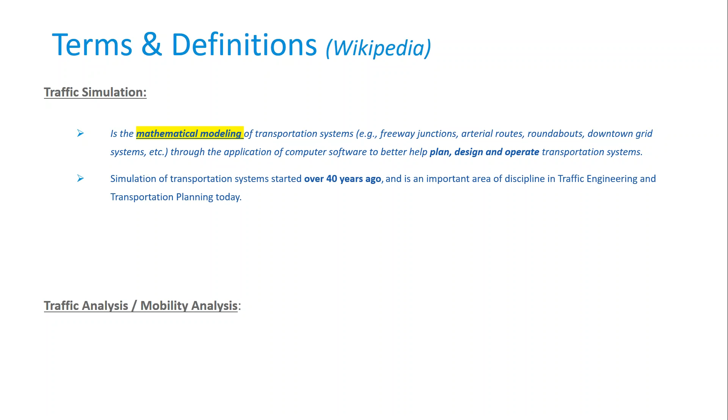The simulation of transportation systems started a long way back, over 40 years ago, and it's a very important area of discipline in traffic engineering and transportation planning today. The simulation in transportation is important because it allows us as engineers or as consultants to study models that are too complicated for analytical or numerical treatment manually. And it also helps us produce very attractive visual demonstrations of present and future scenarios. Hence, we know how to design our projects or expand them further.

For traffic analysis on the other side, or mobility analysis in civil engineering, it's basically studying the interaction between vehicles, drivers, pedestrians, cyclists, and other travelers and infrastructure objects.

So anything basically that moves within our system or structures is part of the system analysis, so things like highways, signage, and traffic control devices. The aim of having that analysis is understanding and being able to develop an optimal road network with efficient movement of traffic and minimal traffic congestion problems. So these are just top definitions for these two items.

Now, before we talk about the software and how to make use of it, we need to understand the travel model. So in any travel model, we have zones and we have areas. I'm going to talk about both, but let's think of people moving around our transportation systems as demand. These people demand a certain level of service. They demand that they're able to move from point A to point B, etc. And then the supply basically are the vehicles or means of transportation, like walking, like taking a taxi, a bus, etc.

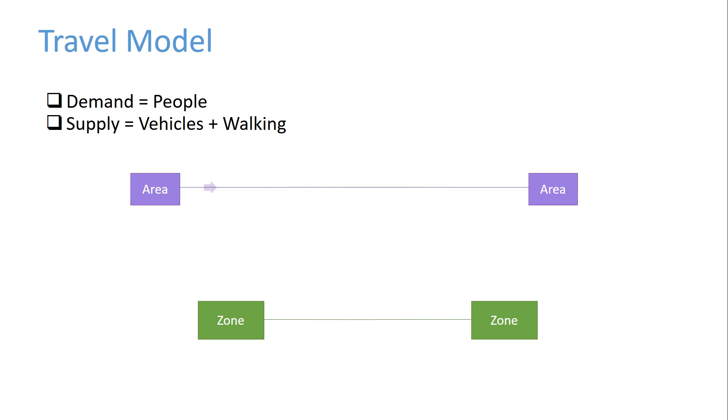What we're doing with InfraWorks or tools like the mobility simulation within InfraWorks is basically being able to model the journey from an area A, where people will take some sort of transportation, to area B. And the way we do it, we specify an area A. That area connects to zone, let's say 1. That zone connects to zone 2. And then from that zone, we go to area B.

A simple example would be a passenger going from, let's say, home to a bus station, taking the bus to the other bus station, and then walking towards campus or the place of work. As simple as that. What I want you to get from this demonstration is that the term area is used for people and the term zone is used for vehicles.

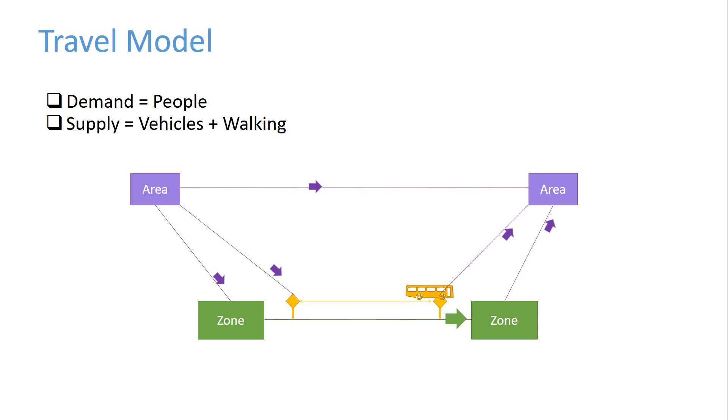So why do we need to simulate? In many cities, private car travel is the dominant mode, right? But that actually creates a problem because population is ever growing. We have more cars on the road and we have more traffic congestion problems worldwide in many cities and capitals. Hence, we as engineers are usually tasked to solve this problem.

The easiest solution is just to create new roads, right? We create new roads, or we add new lanes to existing roads, etc. That's the easy way out. But we already know that in many cities worldwide, we're running out of space. This is why we need traffic simulation and mobility simulation algorithms to help us understand how we can optimize the performance of those existing systems.

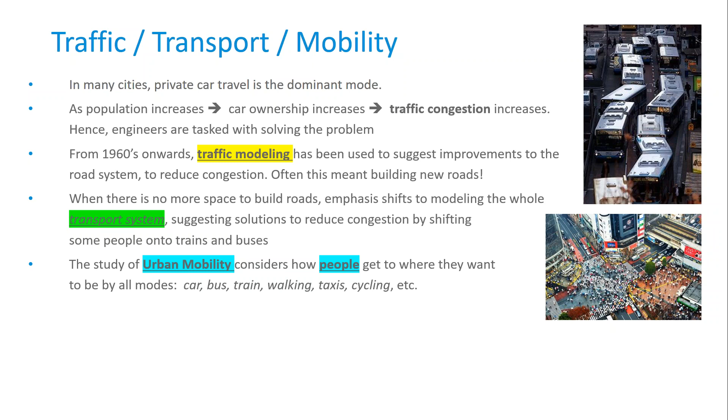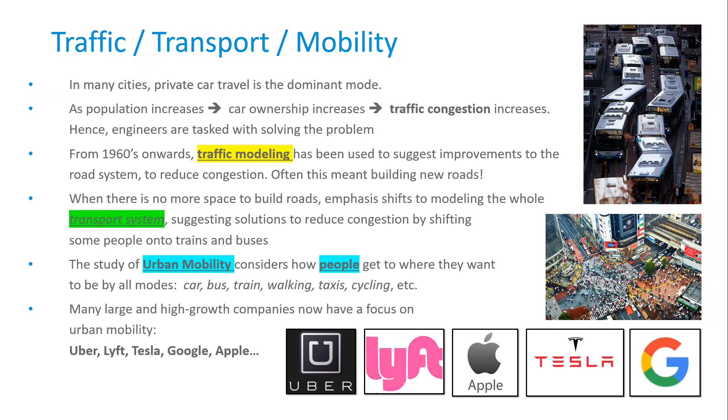So basically, urban mobility considers how people, not just vehicles, get to where they want to be using multiple modes of transportation, like a car, bus, train, walking, taxis, cycling, and others. And by the way, many large and high growth companies worldwide now have research centers and very detailed plans and focus on urban mobility, like Uber, Lyft, Tesla, Google, and Apple. So this is really a very important area of study and research.

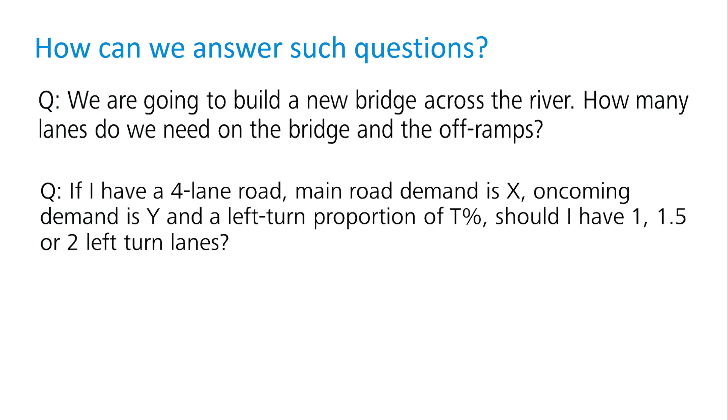So how can we answer such questions? For instance, we are going to build a new bridge across the river. How many lanes do we need on that bridge and the off-ramps? Do we design it for the existing demand or requirements of traffic, or do we plan it for 10, 20, or 30 years? If we have a 4-lane road, main road demand is X, the oncoming demand is Y, and there is a left turn proportion of T percent, should we have 1, 1.5, or 2 left turn lanes?

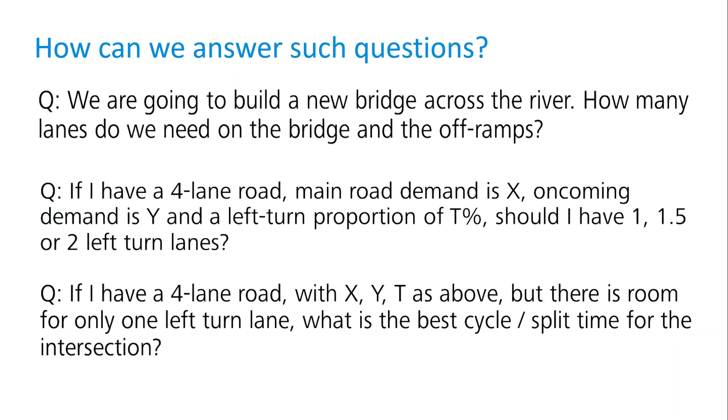Another instance, if I have a 4-lane road with X, Y, and T as above, but there is room for only 1 left turn lane, what is the best cycle or split time for the intersection? How do we time the traffic signals to optimize the movement of traffic and reduce the congestion, the queue length and the queue delay? All of these questions can be answered using the traffic and mobility capabilities within InfraWorks.

And by the way, usually within any infrastructure project workflow, we start by planning the project. We leverage InfraWorks to do things like identifying the need early on. We propose designs, so InfraWorks allows us to come up with option A, option B, and option C, what we call optioneering. Then we analyze those designs. After analysis and validating them, we select the best design option to take further into detailed design.

A very simple diagram would show us we have design A, costs us this much, has these benefits, the same for B, same for C. How do we basically analyze those benefits and quantify them? By using tools like traffic mobility simulation and InfraWorks. And once we're done, we move that best selected design to AutoCAD Civil 3D and other tools down the line.

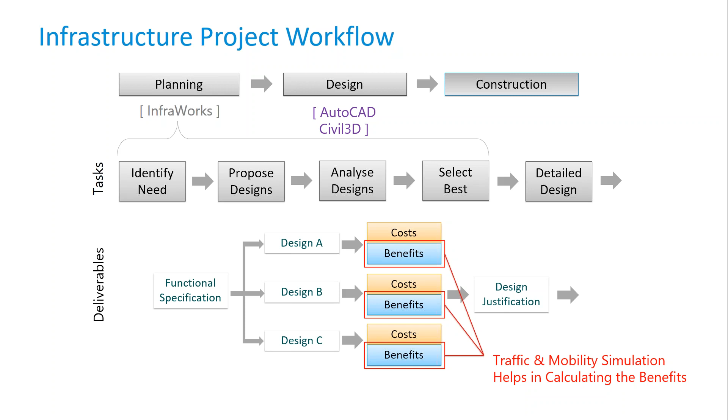Now, most of the transportation systems worldwide get decided upon using this cost to benefit ratio. So we analyze what is the cost of constructing or implementing a transportation system of upstream bridge, downstream bridge, maybe creating a tunnel. And as you can see, for example, constructing a tunnel costs a lot more. So we have the cost in there.

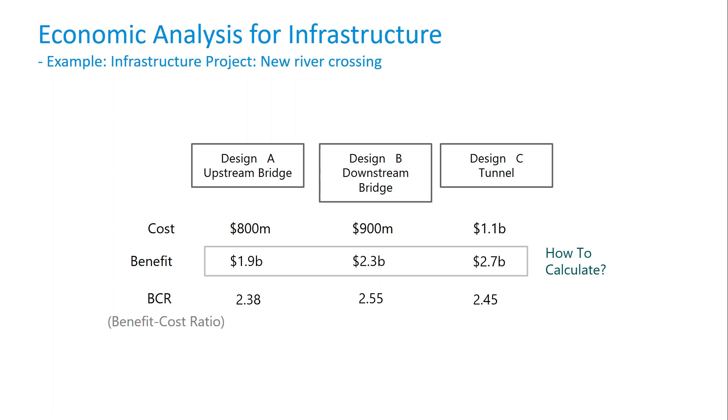We get the benefit, which we can get as a byproduct from using the traffic and mobility simulations. And then we just have the benefit to cost ratio. We pick the one that has the highest benefit to cost ratio to push it forward for detailed design. And how do we actually estimate those benefits?

These benefits might be things like time saved on the way from work to home, or from home to university, or the study place, etc. So we quantify that in terms of money value or time saved. We have distance saved as well, because that translates into less fuel being consumed, less maintenance for the cars, and definitely less cost. Things like stops saved. So also fewer stops mean less fuel, less maintenance, etc. So this means a smoother ride from point A to point B.

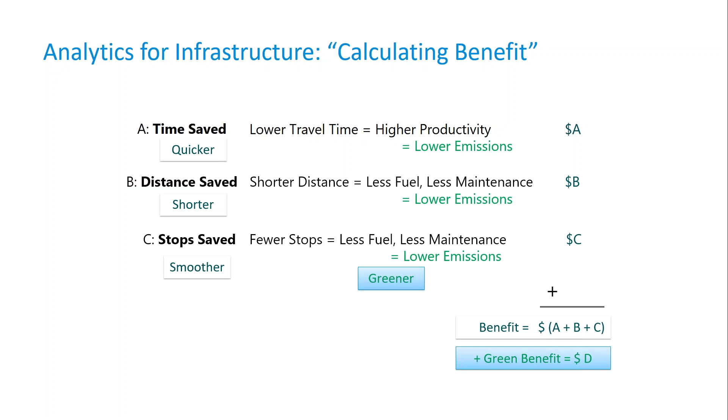All of these and many others are being calculated to get the total benefits of having a certain design option for an infrastructure or transportation project. But then we also have to take into account the lower emissions and having a greener project and less impact on the environment. So all these add together to finalize the benefit of any project. Now for transportation modeling, we need to maximize the benefit and minimize the cost.

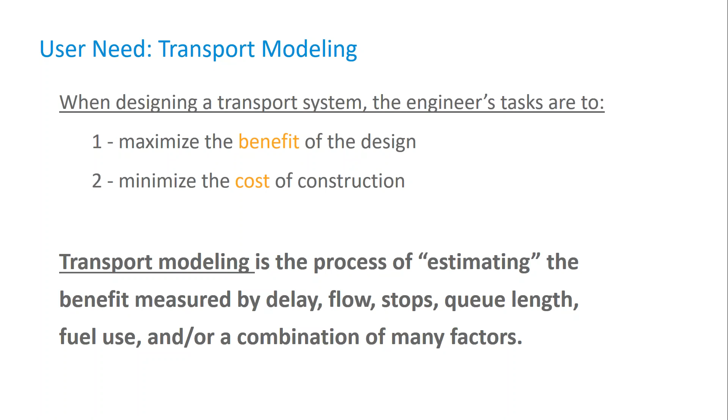And by the way, transportation modeling is defined as the process of estimating the benefit measured by metrics like delay, the flow, the stops, the queue length, the fuel usage, or a combination of many other factors, most of which we can check using the simulation tools inside of InfraWorks.

Now, in the industry of traffic modeling, for those who are new to this domain, we do have 2 or 3 major ways of calculating the traffic and checking for delays. There is the deterministic method, which is very simple, using simple equations with inputs and outputs. And the typical use case for such a method is usually to estimate the capacity from geometry directly for simple scenarios, like one simple intersection, one simple roundabout, basically one bottleneck in the system.

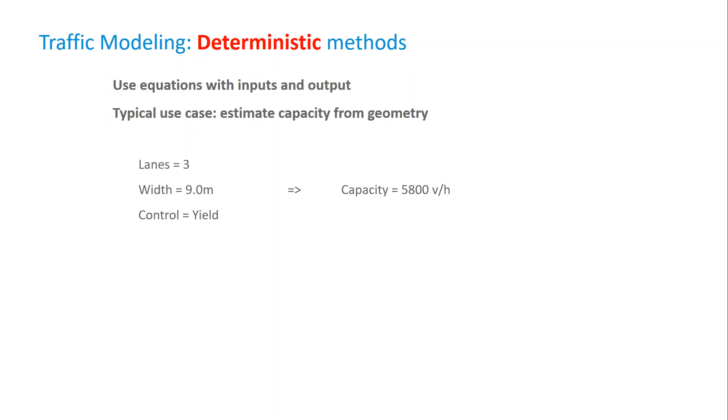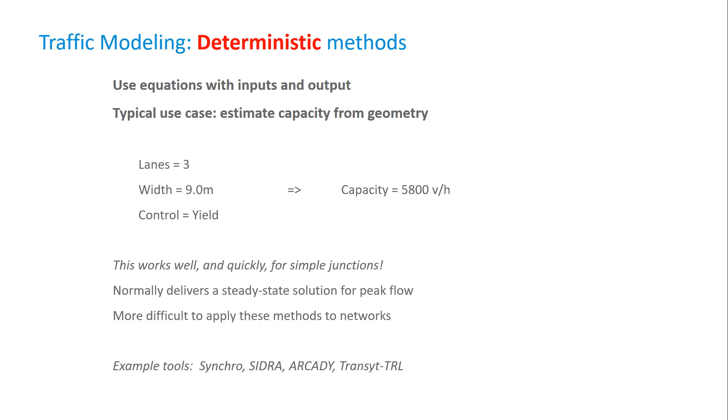For instance, we have 3 lanes, we have a width of 9 meters, we have a control that's basically yield, maybe not signal, and then we have a static capacity of 5,800 vehicles per hour. We don't have any variation whatsoever throughout the hours of the day. And then by using simple calculations, we calculate what is the expected delay and the peak flow at that point in time for this existing system.

The more advanced way of doing it, and this is what most of the available software or tools in the market do, is what we call stochastic methods. And here we not only have a specific number or a specific geometry or a specific flow or number of vehicles per hour, but rather we have a range of inputs. So this means we deliver a range of results as well.

We use simple mathematics and a set of rules to approximate a complex system, yes, but the input is actually what matters. This means vehicles move through a network adhering to a car following and gap acceptance model, which we as traffic engineers or designers set into the system.

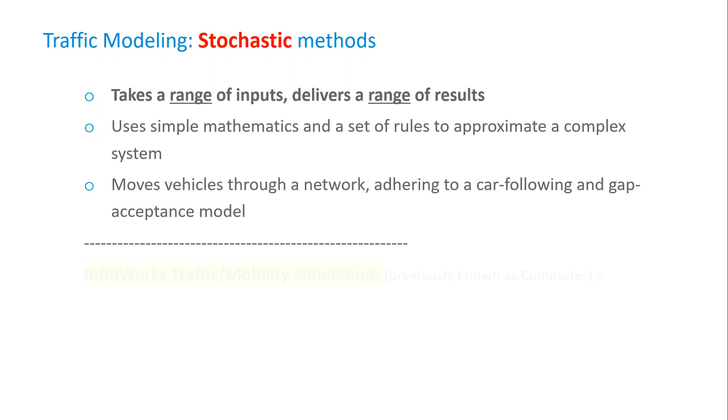Now, it's worth mentioning that InfraWorks traffic mobility simulation capabilities, and by the way, they used to be known as Commuter, the technology that Autodesk acquired before integrating with InfraWorks, use car following, lane changing, and gap acceptance algorithms that are updated several times every second, which provide the basis for calculating delays, and it's called a micro-simulation method.

Micro-simulation in the sense that each and every car, each and every vehicle, each and every pedestrian is considered a separate entity that has specific parameters. Let me take, for instance, a driver. So one driver can be considered a very smooth driver, keeping a long safety distance between his vehicle and the other vehicle. The other driver might be aggressive, might keep a safety distance of maybe less than 2 meters.

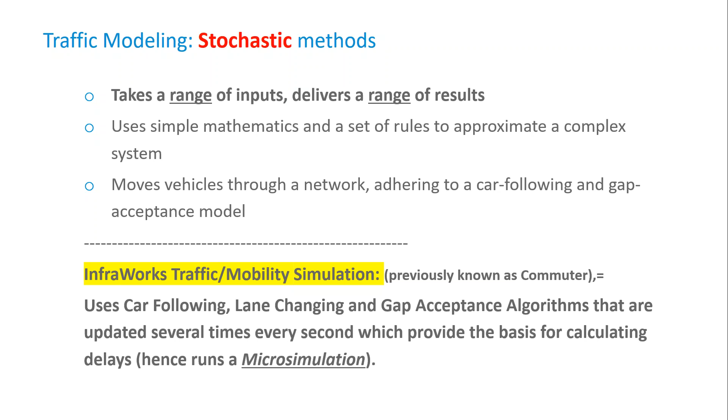All of these can be input in the system, and we can analyze each and every driver, each and every pedestrian throughout. This is why we call it micro-simulation.

Hence, we have a different mean or different average of delay based on the properties and not just the numbers that we have for the flow or number of vehicles passing per hour, giving us more insight how the project will perform over time and based on different parameters.

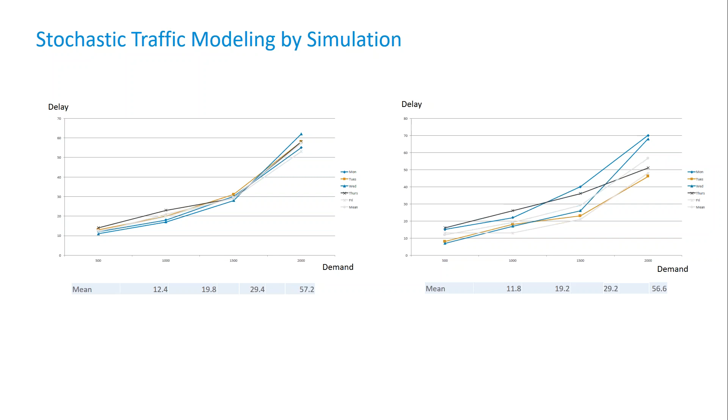Okay, so that's enough about the principles and the theory. Let's talk about InfraWorks and what InfraWorks can bring to the table. We have traffic simulation and we have mobility simulation engines inside of InfraWorks. So once you open your InfraWorks software and once you go into the road module, which is over here, you have to go into the analysis tab, and under which you will have fly out icons that basically have a traffic simulation icon and a mobility simulation icon.

Okay, the traffic simulation capability basically allows you to simulate and analyze the movement of private vehicles only, meaning cars and trucks, and in some instances just crosswalks, simple crosswalks, pedestrian crossings. It basically does the simulation in the cloud, and then pushes it to your machine, animates the InfraWorks model in Canvas, and the delay and queue results are shown also in Canvas as well. I'm going to show you examples later on.

On the other side, mobility simulation allows you to analyze and simulate the movement of all possible vehicles and pedestrians. This including cars, trucks, buses, trains, and taxis as well. So we basically simulate pedestrians and cyclists. And by the way, that simulation is being done on the desktop itself. So it's desktop centric. Mobility simulation is a separate desktop tool, and the mobility simulation is basically launched from within InfraWorks, but does not send the results back to InfraWorks. I'm gonna tell you what that means in a second.

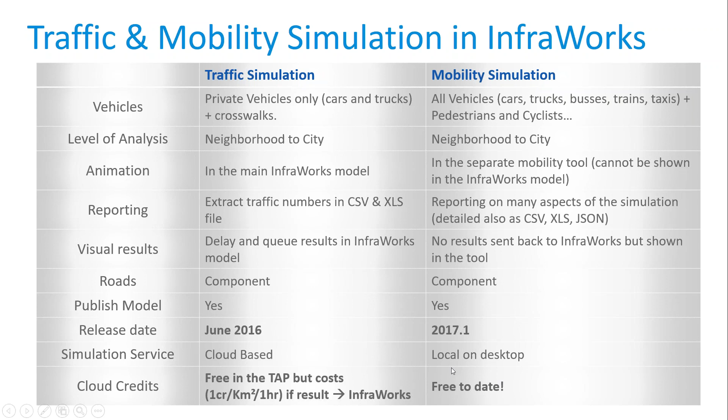Now, I want to mention that if you want to run traffic simulation and have those animations shown in the InfraWorks model, it's actually going to request you to have some cloud credits. So if you want to simulate a model that is around 1 square kilometer for 1 hour, this is gonna request 1 cloud credit in terms of consumption. If you have 2 square kilometers, you multiply that by 2, becomes 2 cloud credits. If you have 2 square kilometers for 2 hours, then you multiply 2 by 2, and then you get 4 cloud credits required to run that simulation. However, mobility simulation is free of charge because it's not gonna push that into the InfraWorks model itself.

Okay, why use traffic simulation? We use traffic simulation capabilities inside of InfraWorks for 2 different project phases. We use them for the pre-construction phase, whenever we are planning and designing a certain road, highway, or even intersection. And we definitely use them also for post-construction stages.

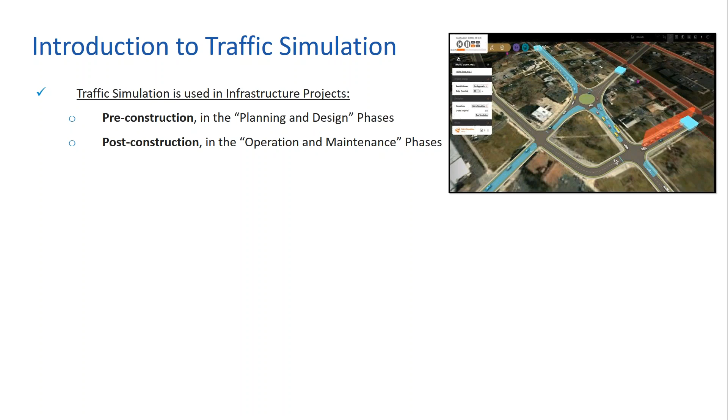So whenever we have an existing network, how do we leverage those simulation capabilities to check where are the possible bottlenecks? What if the demand increases and there is a huge increase in population or number of cars on the network? Things like that. What if we have a construction project going on and 1 or 2 or more lanes will be obstructed or closed for construction vehicles?

It also helps us to visualize and communicate the design very quickly and very easily, and showing definitely the benefits of that design. So I'm going to show you a short video which basically shows you the existing conditions right now, and we have a lot of traffic. We can check the traffic queue lengths and delays from the model as well. We can see what are the proposed conditions after we, for example, add a turning or additional lane. And we can see also the process throughout the construction phase in 3D.

Typical users for the traffic simulation and mobility simulations are definitely the consulting firms like AECOM, Jacobs, Parsons, and many others, and definitely many of the other smaller firms who are really specialized in traffic and mobility studies. The typical end users, as you would expect, are usually the governmental entities, the departments of transportation in the US, probably municipalities, any governmental department or entity that has to do with the traffic and the levels of service.

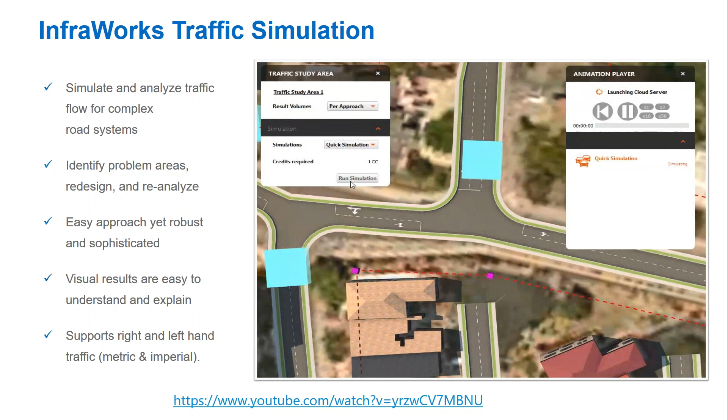So the traffic simulation, as you can see from this model, is very simple. We can rely on the software to do the simulation for us, or else if we have the traffic demand, which is more accurate data, we can plug it into the system and then run the simulation to see the average delay and the average queue length at any bottleneck, whether it's an intersection or a roundabout, for instance. And then on the fly, because it's a BIM 3D model, we can click on that intersection and modify it. For instance, add an additional lane, specify the timing of that intersection if we have a traffic signal, or just maybe place a yield signal and let the traffic take it on its own.

So in this case, we added one lane. We ran the simulation again based on the same traffic demand, and we figured out that this bottleneck has been resolved. We have a shorter queue and a shorter delay for the traffic, meaning the level of service now is green or blue, depending on the level of service we have, and it's compliant with the requirements of the level of service.

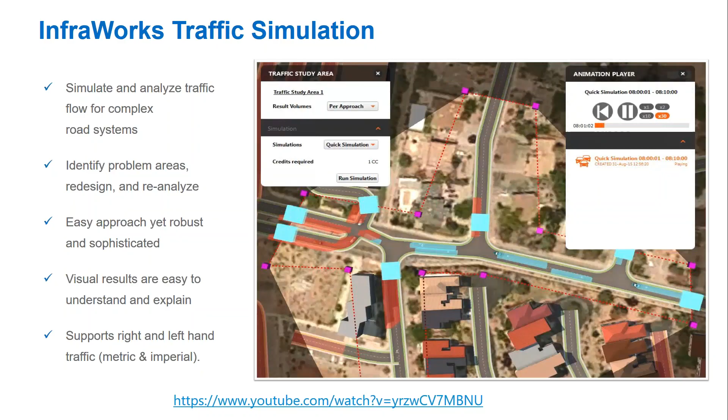Okay. The other way of using the traffic simulation is basically throughout the construction process. So we have an existing network, and as you can see, vehicles are moving around freely. Maybe the levels of service are okay, but we can check per lane, we can check per approach. And let's suppose there is a construction project that's going to take place over here, and maybe one of the lanes will be obstructed or closed for traffic. So we can directly see the impact of that construction project on the existing traffic. We have too many red queues over there, which means the levels of service are not maintained.

So what if we change the timing of the intersection? Let me move a little bit here. So yeah, we just change the timing of the intersection to give more priority to some approaches or some lanes. We run the simulation again, and we find out that this basically solves the problem. So there is no need for us to add additional lanes or have additional investment. Just a small modification of the traffic controller for the signals, and the problem will be resolved.

And by the way, transport modeling itself is a well-defined process. There are many manuals, many systems to manage the modeling and the analysis of transport. I just want to mention, for example, the New South Wales in Australia. We have the London manual, and we have definitely the Federal Highway Administration in the US. Luckily, the commuter engine, which is basically the technology backing the traffic and mobility simulation side of InfraWorks, is already approved in many of those manuals, like the one coming from Australia or New Zealand, and others as well.

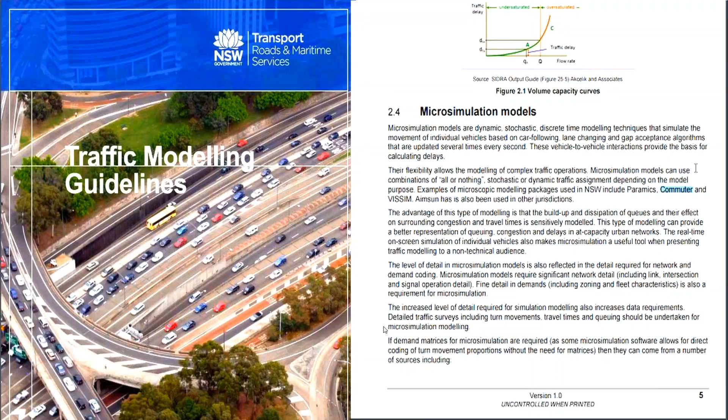Okay, so whenever we talk about traffic modeling, we have different tiers or different levels of complexity. The InfraWorks traffic and mobility simulation is basically catered for the smaller ones, like a local area model. And by the way, this is from the London, the UK transport manual. So you can see the local area model over here. We do cover it by InfraWorks. The micro simulation model as well, which includes maybe up to 50 different intersections or roundabouts, 50 to 75 max.

And then we have what is called the area model. So we touch on that area model as well, but we cannot cover a huge area of over, let's say, 75 different bottlenecks. There are other tools available in the market to do so, like Visum, for instance, and there's definitely the larger area or strategic model for the whole city with its neighborhoods that can be simulated in other tools available in the market. So our focus for InfraWorks are these three areas only. What we call the neighborhood up to the city scale model, in fact.

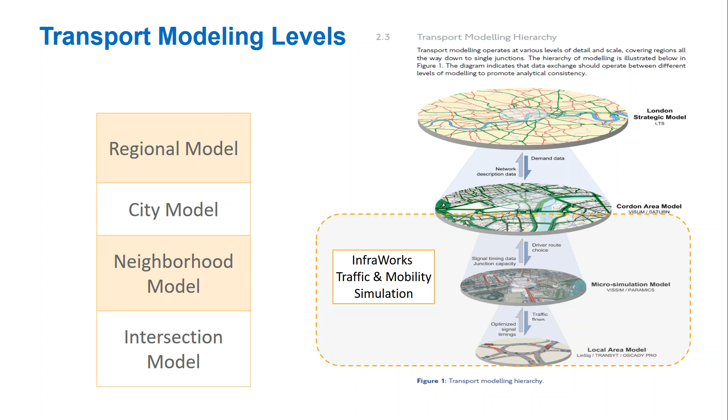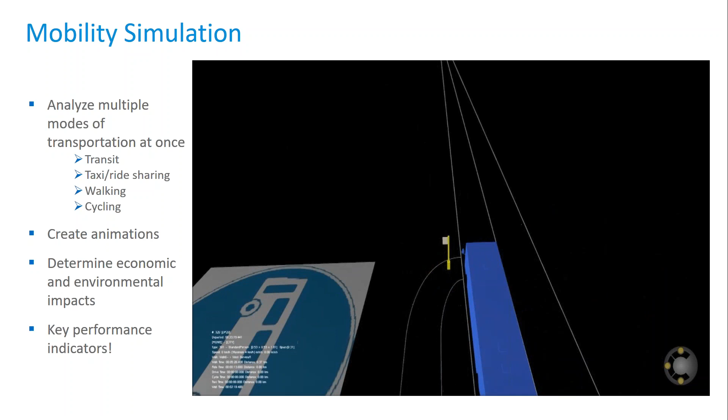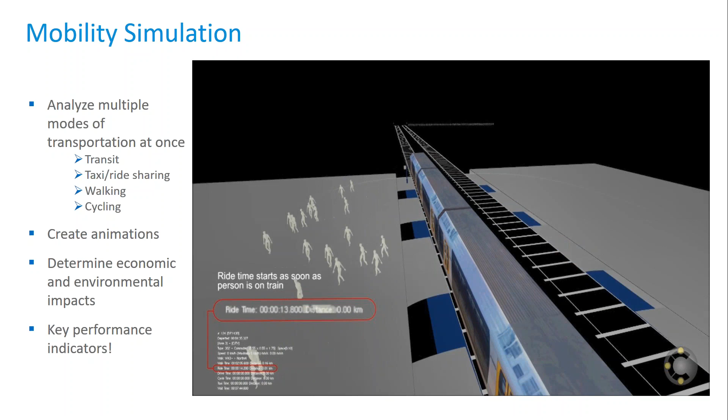Okay, so we talked about traffic simulation, we talked about the theory behind it. Now let's move into mobility simulation in particular. As I mentioned, the compute engine is the one driving all the simulation, the calculation, and analysis in the back end. What you see from this video are different cases of using the mobility simulation, of checking, for example, a pedestrian going from point A to point B using multi-modal systems, using a car, a taxi, a bike, a train station, checking through security gates, etc. So all of that can be captured in one single InfraWorks mobility model.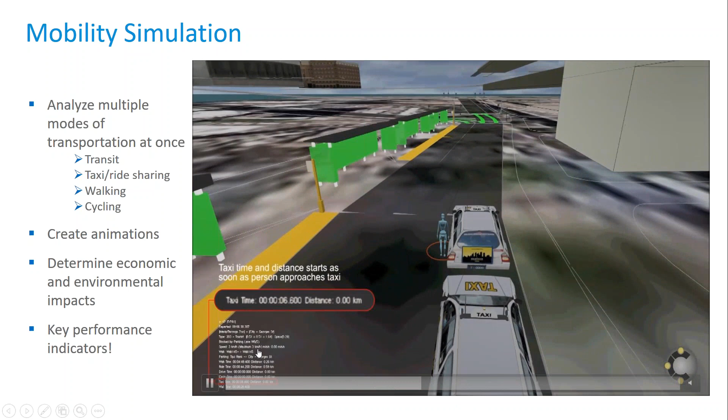And as you can see, while we're doing the simulation, we do have direct feedback about the steps made, about the time required to move from point A to point B to point C, and even we can estimate the cost of that movement or that travel, because we do have key performance indicators. So why do we use this? We use the InfraWorks mobility simulation to design and check things like the queues, to compute the number of security agents at peak hours in airports and other places, to optimize the space, and definitely check for the levels of service, not only for vehicles, but also for pedestrians or people moving around.

It also helps us a lot in justifying investments. So if we want to add lanes, if we want to add security agents, if we want to, for example, create more space for people to gather in, or even maybe extend the scale of a train station, all of that can be justified by running a simulation and analyzing the results using this tool. It helps us, as I mentioned, in the platform design for train and subway stations to size them properly. It also helps us in automatically computing the optimized time for the subway doors to remain open at peak hours, or the optimized time of the traffic signals on any intersection.

And definitely optimize the time spacing between trains. So even for train stations, the time required between each and every train can be optimized to cater for the level of service at that particular train station. And we can definitely model more than one train station within the same model, and then run the whole analysis for all of them at once.

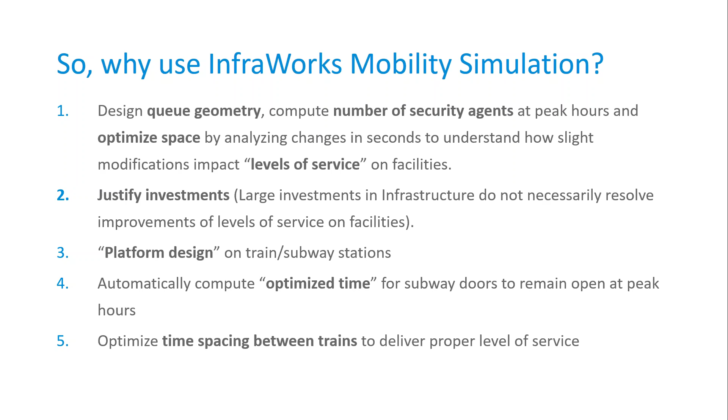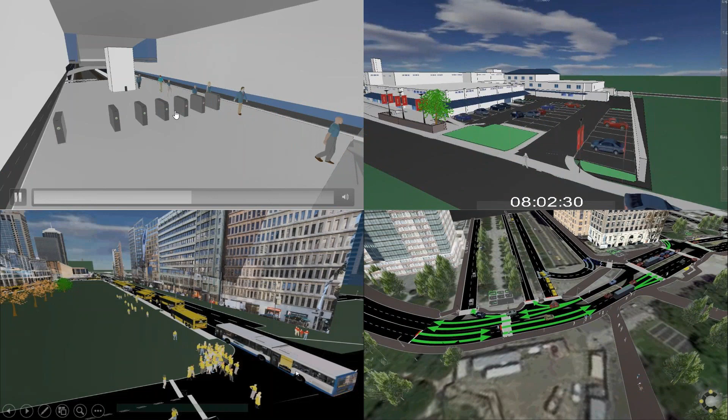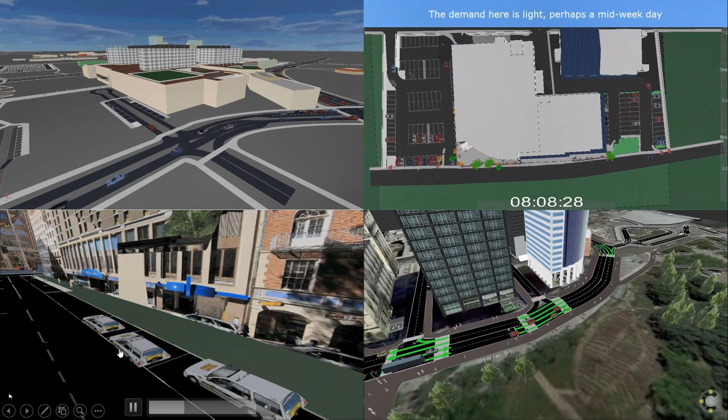Then people, for example, get to a station or a place where they need to tag their cards and move into the platforms, take different sorts of transport. On the right, we have a parking layout, people moving in, parking their cars, and then getting out of their cars, moving to, for example, a shopping mall or a certain interesting destination. On the bottom left corner, we have a city model with parking bays parallel to the road, with taxis as well, so we can simulate people getting to the taxi, riding the taxi, and moving from point A to point B, etc. So many use cases are available.

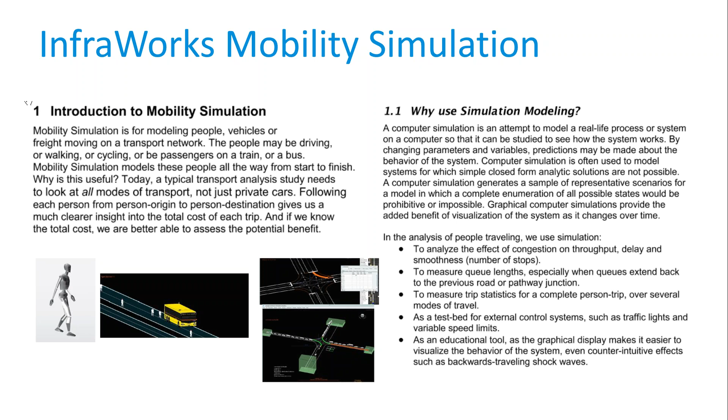And the good thing about this mobility simulation tool is that inside the tool itself, there is a huge manual, including all the things that can be simulated, how to simulate and analyze them, and what are the steps required to basically create a model. So you'll find many different articles and documentation on how to use mobility simulation, why to use it, and the expected outcomes out of it.

Now I'm going to share with you a real case study from Colombia. It's using the mobility simulation tool, in particular for the San Andres Island airport. Okay.

And then they had this issue of the San Andres Island. It's a very small island over here in the Caribbean Sea, where the island has only one airport. That airport is very small and cannot basically serve the passengers. This is a snapshot of the island. This is basically a layout or a plan drawing for the airport in San Andres.

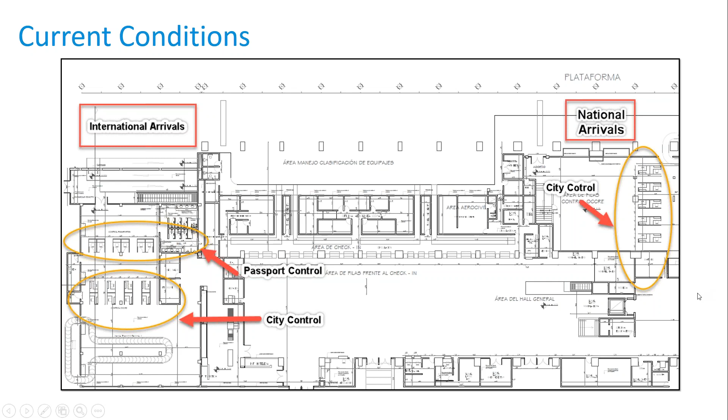And this is actually what was used to model the mobility simulation model inside of InfraWorks. So no CAD, no Revit model whatsoever. My colleague from the US, his name is Edmundo, took that as the plan or the layout, and then he started tracing where are the international arrivals terminal, where are the control gates for the passport control, where is the city control, the national arrivals, because this airport basically serves both international and national arrivals, and other things as well.

He also took the data from the airport traffic controller about how many airplanes get there at what time and how many passengers are on each and every plane, depending on the plane size and plane details. And then he basically simulated that in InfraWorks.

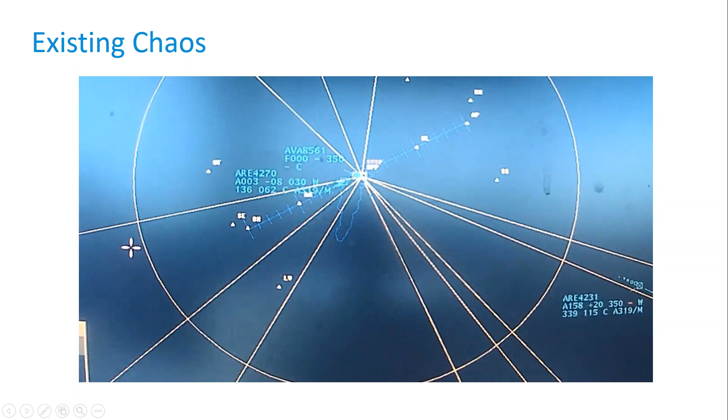And even the traffic controller shared a video of how the traffic was diverted or asked to go around the airport terminal in the air for so much time, not being able to land and basically get the passengers to the terminal. So let's directly show you. This is the San Andres Island, modeled all together inside of InfraWorks.

And for those of you who never used InfraWorks before, we can directly create those models easily using the model builder functionality, up to a scale of 200 square kilometers. But if you do have more data, for instance an area of 1,000 or 2,000 square kilometers, you can still model that very easily inside of InfraWorks. It's a very, very powerful platform that can support huge city scale models.

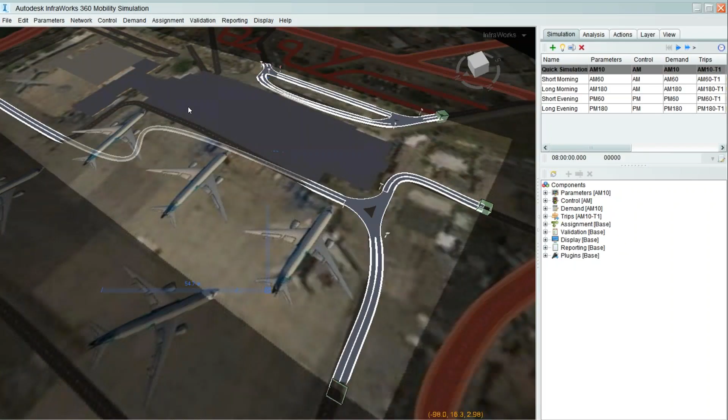This is another screenshot of the model showing the simple layout of the airport. And then we can run the simulation. So let me just open the software very quickly and show you. Okay, I'm gonna go one step back. This is the InfraWorks homepage, so you do have access to all of your models.

I'm gonna just delete that. All of the models that you created are gonna show up with thumbnails. Once you hover over the model, you'll be able to see some more details. So I'm gonna type in order to search and find my model. That's the one. I click on it and there you go.

So I'm gonna zoom out a little bit and show you that this is the whole island modeled inside of InfraWorks. I can zoom in, I can see where the existing buildings are, for example. I can see the existing road network, etc. And to make things easy, I've created a bookmark. Once I click on that bookmark, it takes me directly into the model of the airport.

Okay, so what do we need to do here? I'm not gonna cover it in detail. Basically, using the road module, we click on the simulation tab, and here we just click on mobility simulation. What I did early on is select an area of interest and input all the requirements and details.

What I will do right now, just to show you some of the capabilities of the system, is right-click on that area and then pick Mobility Simulation Engine. Once I do that, it's going to fire the Mobility Simulation panel in the back end, which is a separate instance of the InfraWorks model. And as you can see, I do have some roads and intersections, but this is not what I care about. I'm going to open very quickly one of the models created for that airport.

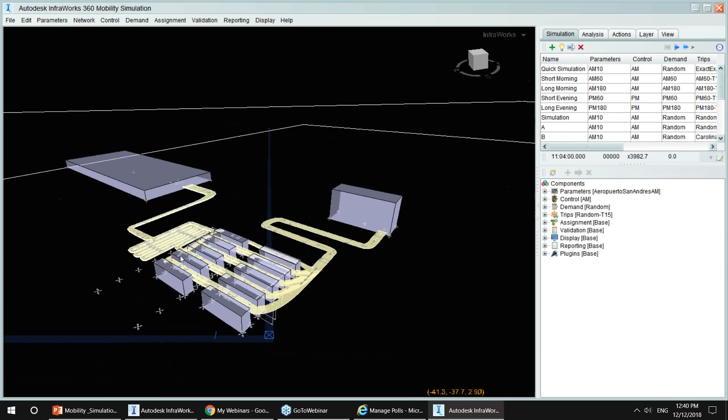So it's saved as an AZA file because this technology was acquired from Azalient company. Okay, this is a simple representation of the international arrivals. For instance, people arriving at the airport, queuing or gathering here, and then coming into the queues before going into security control or screening, and then making the way to the baggage claim.

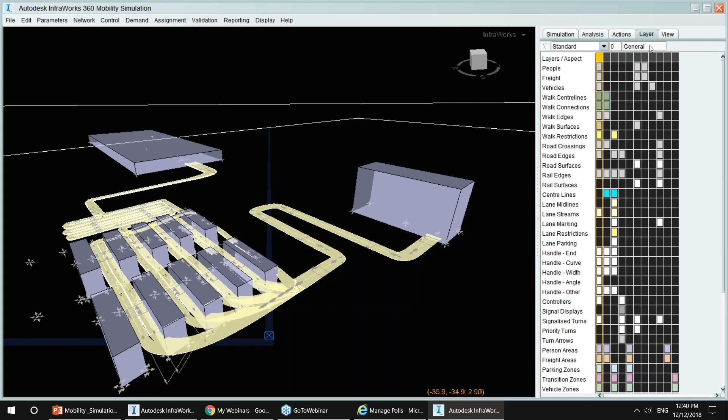To the right of the screen, we have two main tabs. This one basically shows me a list of all the simulations created, different timings, different demands, etc. We have the analysis tab, the actions, the layer where I can turn things on and off to show them in the model. For instance, I have here a very basic model without a texture underneath, without any visualization perspective. And definitely here what we want to see in the model.

Now, to the top left of the screen, you have all the things that you can do. You can specify parameters like terms, behaviors, type of vehicles, and how they react within a certain model, the types of people with different parameters as well, and many other objects also. The network, we can specify trails, surfaces, stands. We can control the intersections. We can control boom gates.

Demands, this is where we create the divisions based on a certain time frame. What is the variability of traffic or pedestrians throughout that demand? We can pick the demands from here, specify. As you can see, it's basically a matrix. And this matrix, we can directly copy paste if we have the matrix in Excel or PDF, just copy paste this data into the matrix and run the simulation. I'm just going to keep this for now, assuming that we have 160 passengers arriving at that terminal per hour.

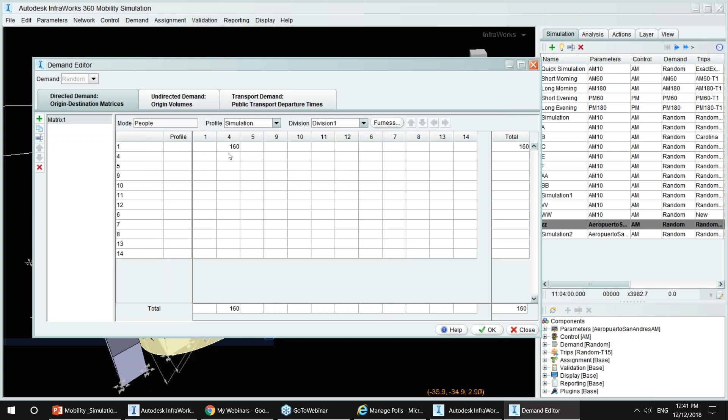And just to show you really quick how the simulation happens, I'm going to pick one of the simulations in here, which I created earlier. I'm going to highlight it. This is the one I want to show in my canvas or model. Click the play button, and then you will see passengers coming into the security gates and queuing. If I want to make it faster, I can click the faster button. I can make it even faster, and then see if people are going to queue or not, or if this queue length is enough for me or not.

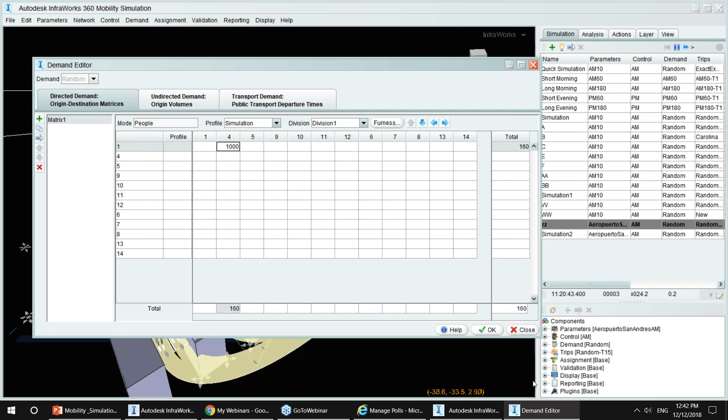Now, this is expecting 160 passengers per hour, which is not much. We already know that most aircrafts nowadays support more than 250 to 300 and even more passengers alone. So what if I come here to the demand tab, I pick the demand matrix, and instead I'm going to put some theoretical figure like, for instance, 1,000 passengers per hour, which is like 3 aircrafts per hour. I'm going to save it, and then I'm going to ask it to run the same simulation again.

Okay, I'm going to make it a little bit faster. And then you see how people start to queue in here, right? So we start to see that we're starting to have problems in real time. I definitely can export this data in terms of time and see how much time I need before we have all the queues completely filled with passengers and even people blocking other entrances or gates from the other side. So it's a very direct visualization on how things happen at InfraWorks or within our model.

So this is basically the model I showed you earlier. Let me see if I missed anything else. Yeah, so we see people moving in, moving out. That's fine, covered. Okay. So as you can see, people are moving in and moving out.

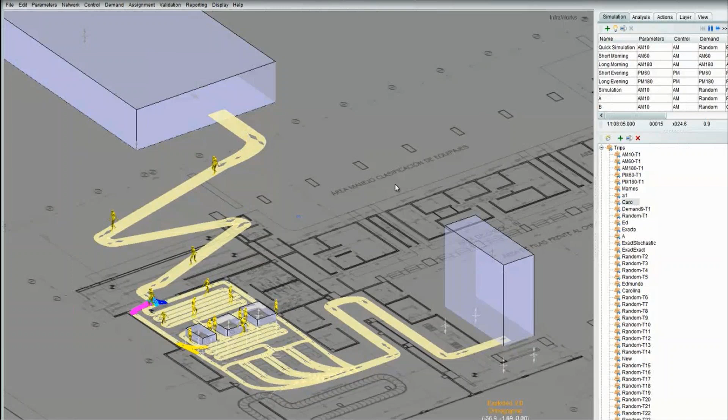This is just an example that we can actually create some lanes for people to pass on, even if there are escalators or elevators in the process, and simulate that as well. We can have also some visualization on what are the preferred routes that people will take based on certain criteria, where is going to be the most delay, and highlight it in different colors or different themes throughout the model.

Okay, so as you can see, for example, we do have visualizations of people themselves. We have people in yellow, people in violet color, and that all depends on the type of people and maybe even on the time of arrival and delay they will encounter.

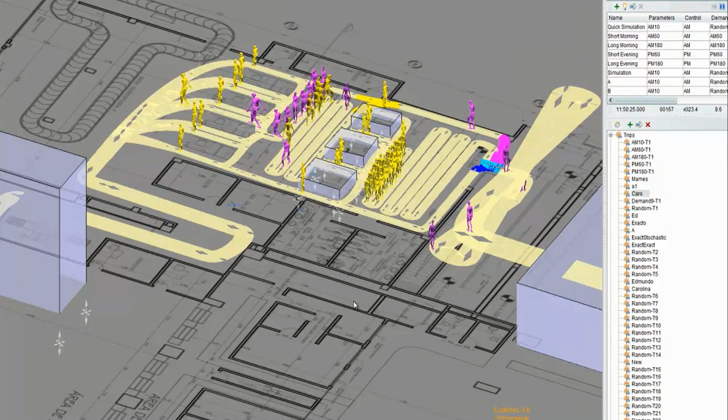Here, we're just showing you the example that my colleague Edmundo worked on. He basically took that layout, which is not even 2D, just a plain raster image, placed it to scale, and then created the international terminal and the local one in one single model, and showed the interaction between the two towards the very end in here.

So it's just simulating the passengers from one side and simulating the passengers also from the other side at the same time. And you can definitely see the interaction between the two. Okay, what are some of the other use cases for mobility simulation? So let's talk about the other ones.

We definitely support parking lots, indoors and outdoors, inside of buildings, intersections, roundabouts and interchanges, roads with pedestrian crossings, and buses and taxi stops and parks and resorts. Let's see some of these in action.

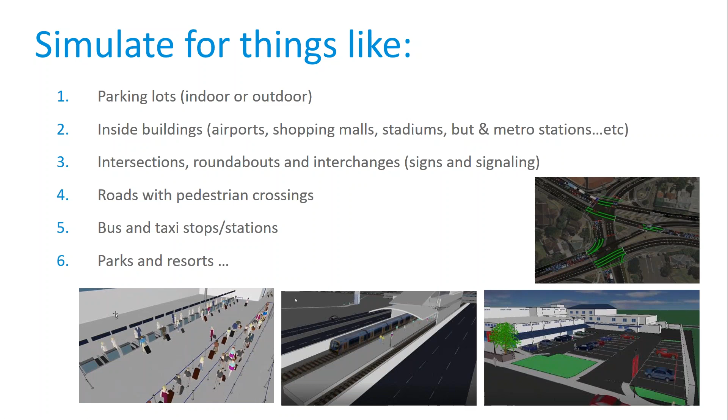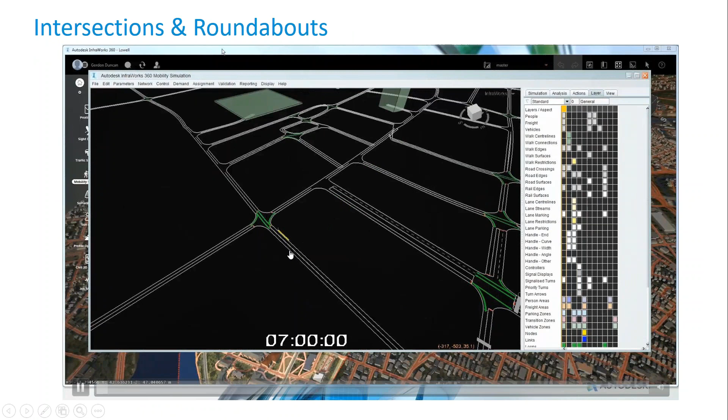So intersections and roundabouts, like we do with traffic simulation, we can do in mobility simulation as well. So you see here, maybe a city scale model with many different intersections and roundabouts. We can simulate all that in one single shot. So I'm just gonna move forward.

We can specify the phases in here for each and every intersection. We can specify, for instance, the allowed movement of traffic. So this lane, for instance, can take the left turn and can go forward, or just can take the left turn. So we specify all those ahead of time. We can specify even all the permissions in one single matrix, as you can see.

We can also add the timing of the green and red and amber signals for each and every approach of each of the signals in there. We have the representation of the traffic controllers. So you can basically configure everything, and you can push it to a traffic controller module that basically will run the whole traffic signaling on that intersection.

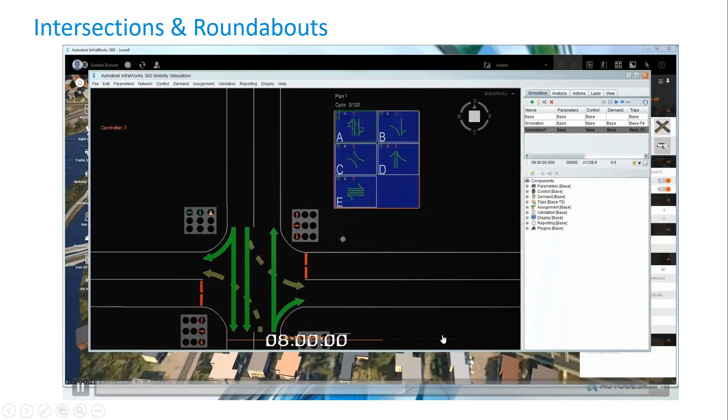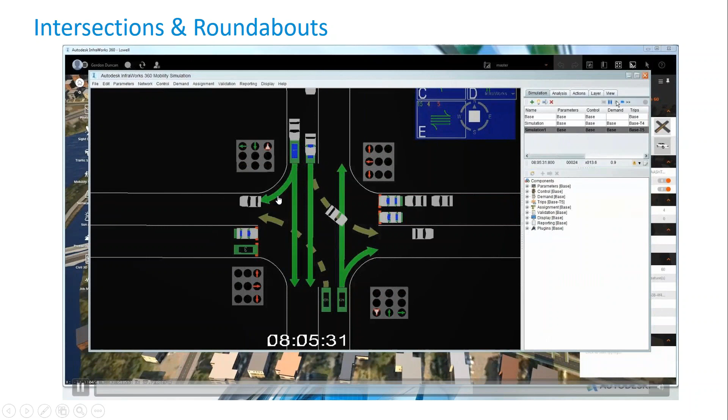So as you can see, we have all of them in here. The phases, the timings, the permissions for each and every lane or each and every approach. And you can run the simulation inside of the mobility tool itself in 2D or 3D. And in real time, you're gonna see the effect on the occupancy, the delay, the queues, etc. Any modification to the parameters will result in a new and updated simulation.

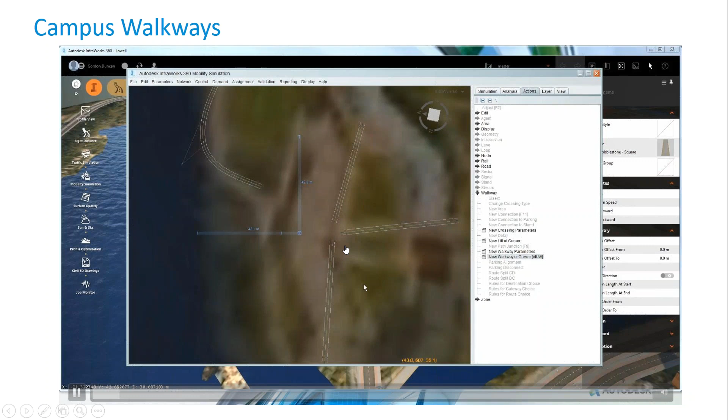Okay, what about campus walkways or walkways within a space like airports, convention centers, or universities? As you can see, this is a very simple way of creating pathways. So we have one, we have two, we can modify them, we can extend, then we select whatever we have as a pathway. We can specify also permissions if there is any object in between, and let the people go around it.

This is just a sample walkway model, and what we're gonna do here is just specify that the middle or the center of that walkway will be obstructed by an object or a construction job taking place. So you will see how people are basically going around that box and not moving into it. And this will also help us understand what is the delay, what is the impact on that model once that construction job is in place.

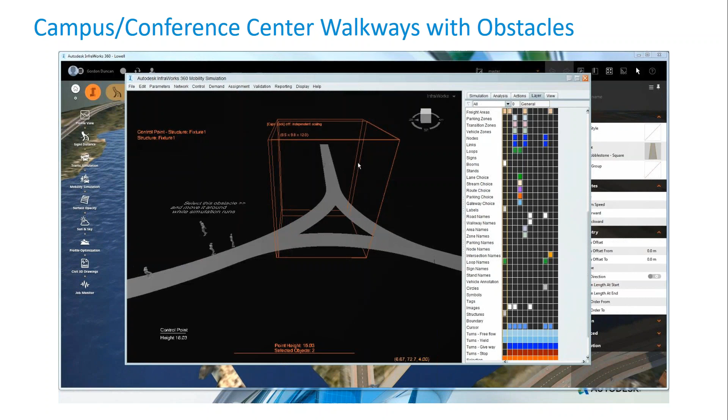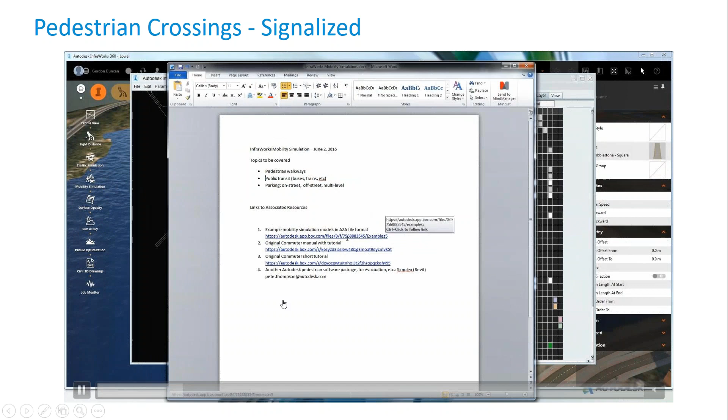Pedestrian crossings. So we all have pedestrian crossings in our cities, and these have either signalized or other forms of control. In this case, it's a signalized crossing. We open the relevant model for it, and then we can start basically modeling that crossing in 3D. So we have 1, 2, 3, 4, 5, and then you can see that whenever the signal is green, pedestrians are allowed to move and cross the street. Whenever it's red, pedestrians are not allowed. They will just queue at the signal and then cross the street.

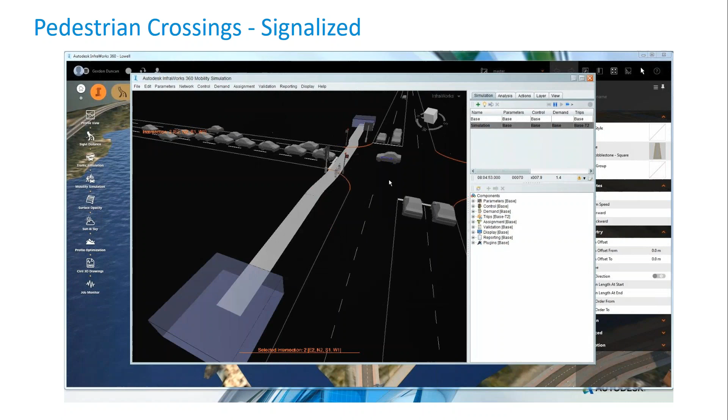By signalized, we mean there is a button for pedestrians to press on to turn the signal from red to green and allow them to cross the street. And that all can be simulated and analyzed in the software and check what is the level of service for both the vehicles at that crossing and for the pedestrians themselves.

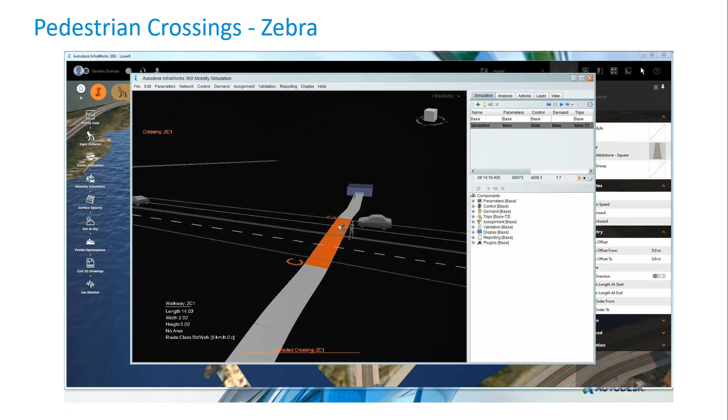What about the zebra crossing? Basically, yield or give way. So whenever the pedestrian approaches, the vehicles will stop. Whenever there are no pedestrians, the vehicles will continue their normal movement. So in some instances, the zebra crossing will be a more efficient option. The controlled or signalized crossing will be better in certain situations. And the tool will allow us basically, as I mentioned earlier, to analyze option A versus option B based on the metrics and numerical figures extracted from the model.

What if we have a crowded city and we have some shared zones where people and cars share the same space? So we see these in many cities worldwide. You can also model that in the same model and see how these objects interact with one another.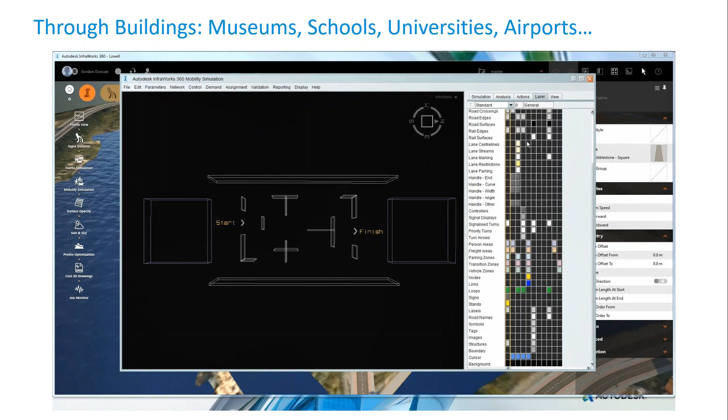We can also simulate and analyze moving people around vehicles, moving people around buildings, inside buildings like museums, schools, universities, and airports. So depending on a certain layout, how much time does it take them to move from point A to point B, from floor 1 to floor 5, using a single route or multiple routes as necessary.

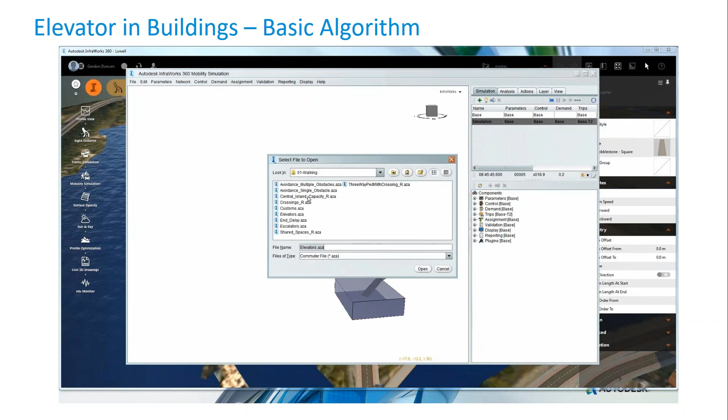We also support simulating elevators in buildings, but just to be clear, it supports only the basic algorithms of elevators. We now know that there are smart elevators in those new towers coming up, where they have, for example, 6, 7, or 8 elevators, and these elevators talk to one another. So if one elevator is empty, it will go down. If the other one is fully occupied, it will not go to the required floor. So that sort of interaction or smartness is not supported, but the basic one is definitely supported in the tool.

We also support escalators in buildings, such as stations, hotels, and other places as well. And the cool thing about escalators here is that they are very detailed. I'm just going to save you some time and move towards the end of it. So as you can see, people are moving up and down. But what's really interesting is that it also supports the movement of people. Sorry, I moved one step further, so it's over here.

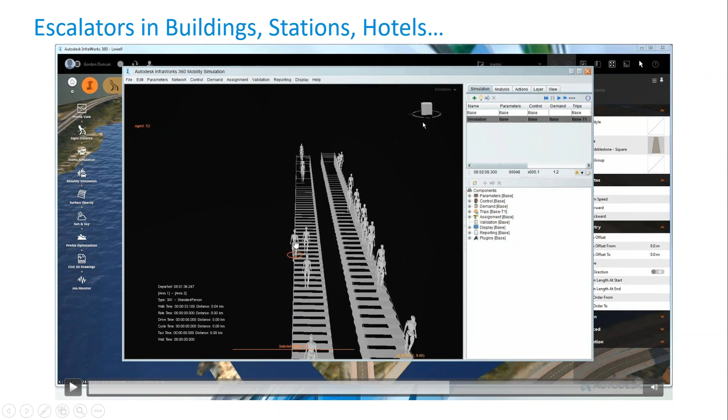So as you can see, we can analyze 2 levels of people going up or going down. So we have the first row and we have the second row. People at the right might have a certain speed, maybe they're just standing there, whereas people to the left are moving or hopping on top of the steps to go upstairs at a faster pace. We can simulate both and check the throughput or the level of service at escalators as well.

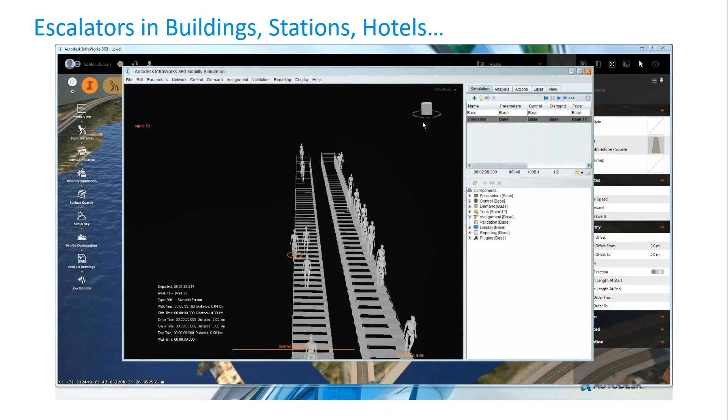We also support transit lines along roads for bus stops. So here we're showing you how to create an area where people will gather or stay to take a certain bus. So we're moving from this bus stop to the other bus stop across some roads and intersections throughout the city. And again, as we've seen before, we can model all that in 3D. We can see the signals, we can see people getting into the bus. That bus is driving through the prescribed route and then moving to the other station.

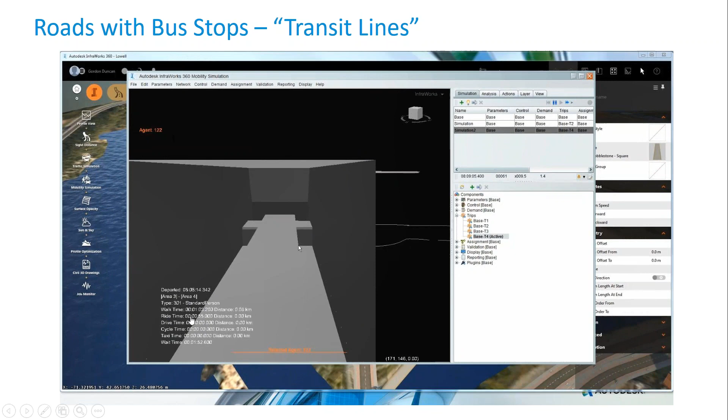We can even model the bus station itself. Do we need more space to accommodate more passengers or not? And we also have the numerical figures to help us see what is the ride time, the drive time, the cycle time, etc., within that model. Do we need to improve it, or is it already okay?

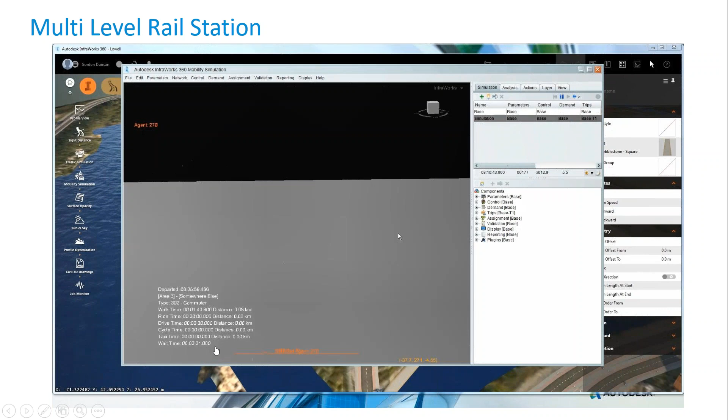Another case study is rail stations. So as you can see from this model, we have a complex rail station of multiple levels. We have the top level, which has the trains stopping. We have the people moving in, checking in, and then moving up using the escalators, waiting for the trains to arrive, and then getting on those trains altogether. And all with numerical data to support the analysis.

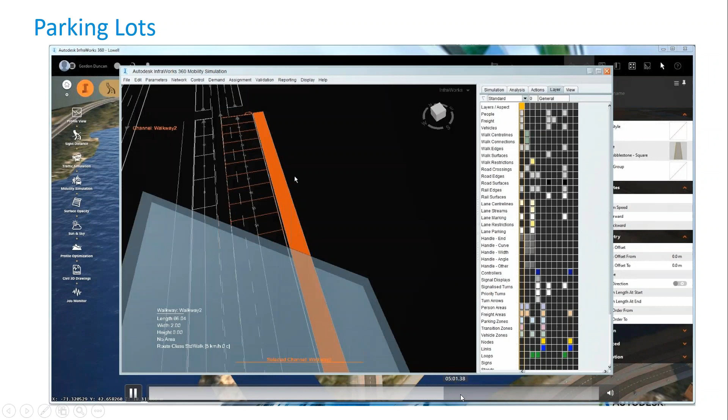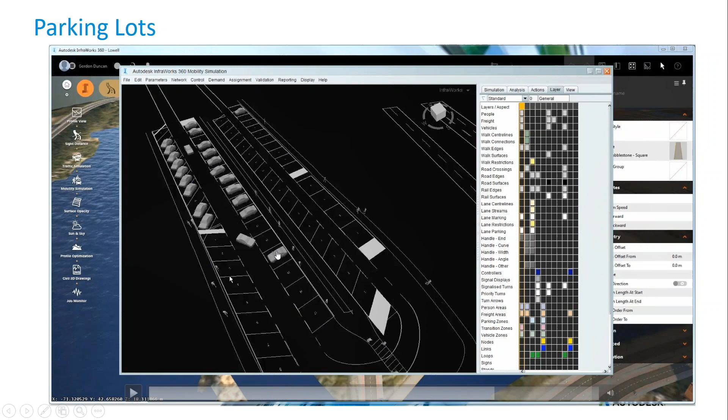Parking lots: it will take into account parallel parking, oblique parking at a certain angle for a certain structure at a certain floor. And same story, we can simulate those vehicles moving in, moving out. Where do people park their cars? Do they move to the other side, take the pedestrian crossing, and how will all that fit into a model, and how would the vehicles and pedestrians interact and affect each other. So this is what the tool can support you with in terms of analysis and simulation.

But let's take a step back. What about sustainability? We all know, and we all believe actually, that public transport is very effective, right? And using our private vehicles like a truck or an SUV or a motorbike is not that energy efficient. But what if in reality we have metros or trains or buses that are not utilized, in cases where people make best use of those trucks or private means of transportation? So which one now is good, which one is bad, which one is more energy efficient? In order to avoid such situations, we need tools like mobility simulation to analyze and make sure they're utilized to the utmost.

And we can extract information like the person hours traveled, the person kilometers traveled, the vehicle kilometers traveled, the vehicle hours traveled. So we're talking about persons, we're talking about vehicles, time and distance. We have multi-modal level of service calculations for both, and we have the economic and environmental assessments.

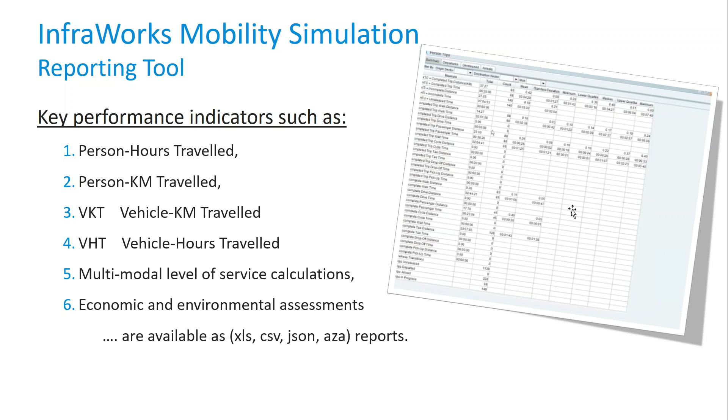So we can add a unit cost for each and every pedestrian and moving object, and then we can analyze the total cost of moving from point A to point B, or the infrastructure involved. So we're not just relying on visualization in 3D or simulation, but also we can get very accurate data that we can leverage in our analysis. So the assessment of that goes like that.

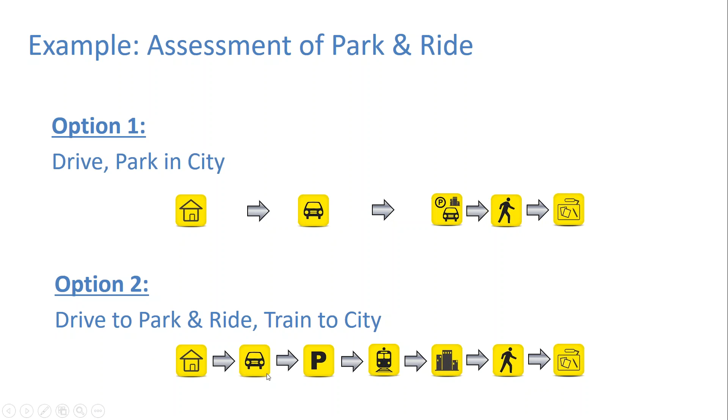We have option 1, drive, park in the city. Option 2 would be drive, then take the train to the city. And how this actually happens inside of the tool is we are micro-simulating each and every step. So we take the car, we take the train, how much time is involved, it's accumulated, what is the distance, and what is the total cost of moving that passenger. This is how the system is doing it, step by step, throughout time.

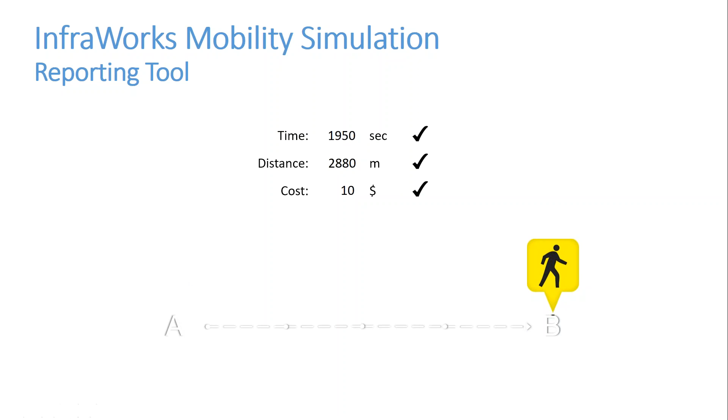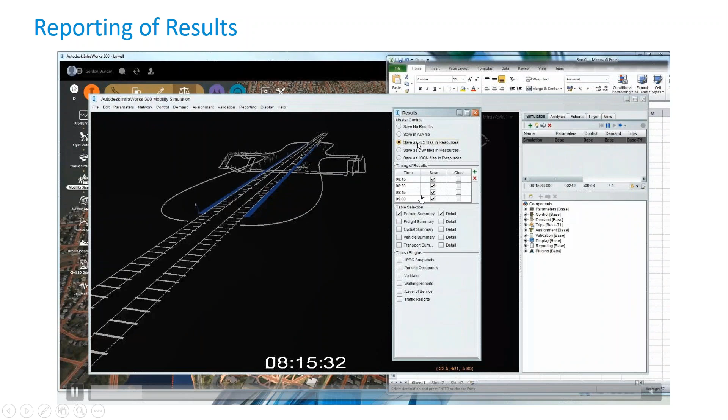And reporting of results, as you can see, is in real time. So we can see whatever is happening in the station and the bus stop across an intersection in real time, updating, and then we can also export it out in terms of results. We have XLS, CSV, and JSON. We can specify the timings that we are interested in or all together, and specify what type of data I want to push at what level of detail into that Excel file for me to analyze later on. So an extensive tool for you to analyze and visualize your models.